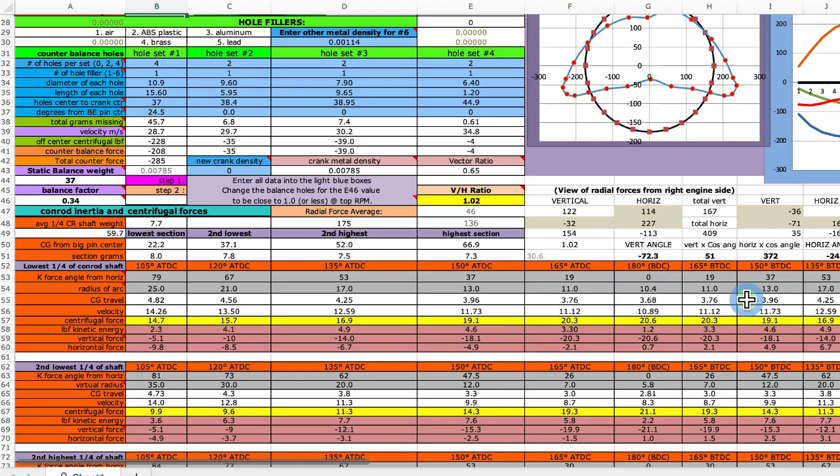All those calculations having been done mostly down here. And so the vertical to horizontal ratio is demonstrated right here. Let me show you what I mean. So you've got the lopsided circular graph of the crank rotation and the forces. Actually, let me show you. So right here at TDC, you've got a vertical force of that amount.

And then 30, 60, 90. Right here, you've got that. It's not completely horizontal. Look at that. It's somewhat downward. That's at 90 degrees. Then you've got bottom dead center. And then you've got 270 right here. So those are the vector forces.

And what I found works is taking this section of the vertical close to TDC and this section of the lower portion, which includes a little bit more of this horizontal effect out here, and compare the two. That's the vertical, that's the horizontal. And so you can call that also top dead center, bottom dead center. 1.0 is the ratio. That's at 6100 on my engine.

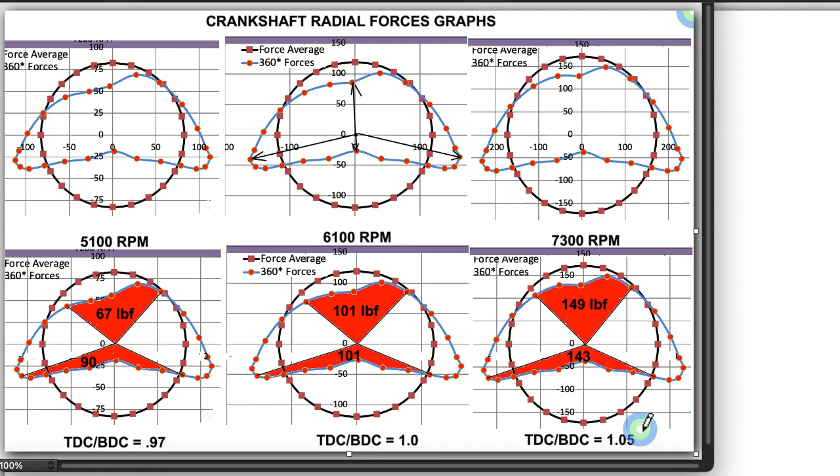At 5100, you can see that the horizontal is more than the vertical, which creates an imbalance. So that's off by 3%. And then at 7300, it's off by 5%. So we got the vertical and horizontal computed here, and then when you figure in the actual average forces involved, this is the graph that you come up with, which is more like what you feel, okay? Which on my bike it's 4% off for most of the RPM up to the high RPM.

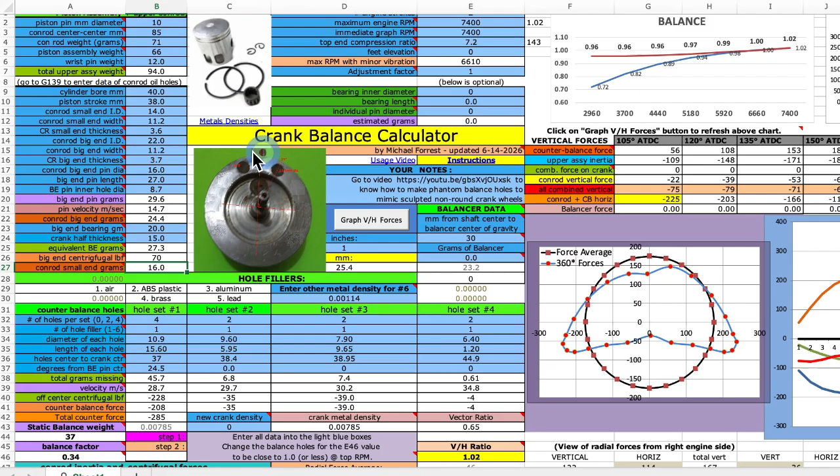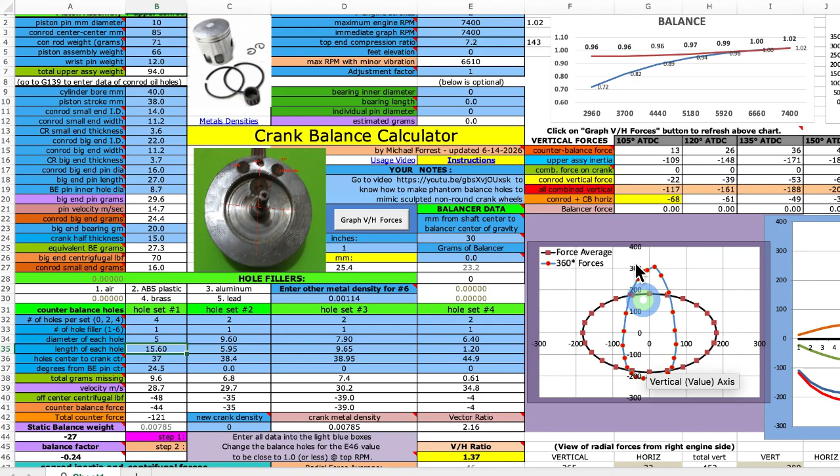So I'm going to show you what happens when you reduce the hole size. One of these holes here close to the conrod pin, if you reduce the hole size, see it becomes more vertical? Because these holes on this side, not on this side, these holes on this side counteract the piston assembly weight. And if you don't have enough holes to counteract that, then the vertical difference becomes more. And the same thing if I make the holes too big, then I've reduced the vertical a lot and it's got a lot of horizontal component there.

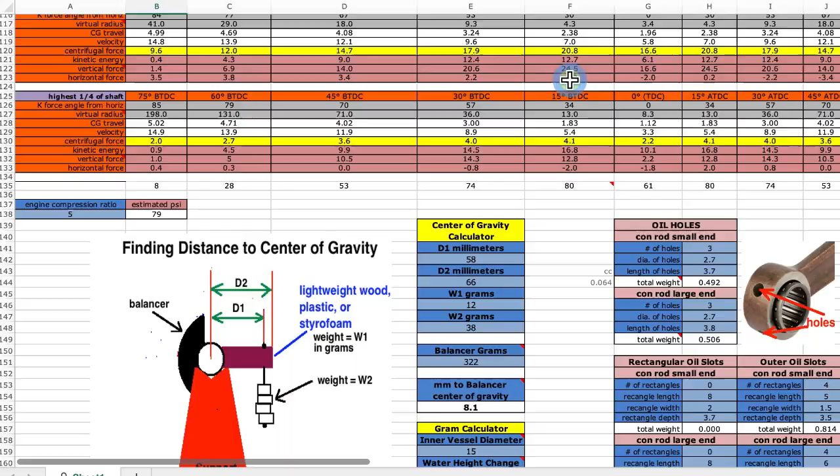So right here is the maximum engine RPM, the very top that your engine will rev out to. The top end compression ratio is figured in. That little dip right there, that's due to the compression. Okay, there's a little calculator for that. Down here, this section right here. And every cell that has a red corner on it, you should hover your pointer over it so you can read what the hidden comment is to be fully informed.

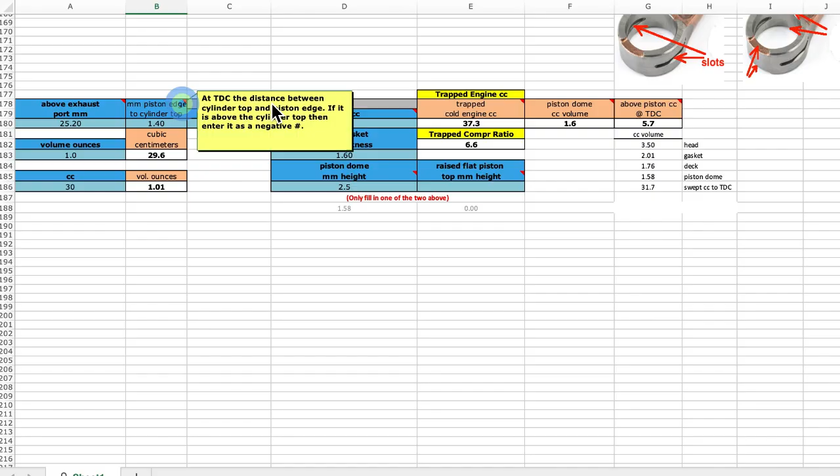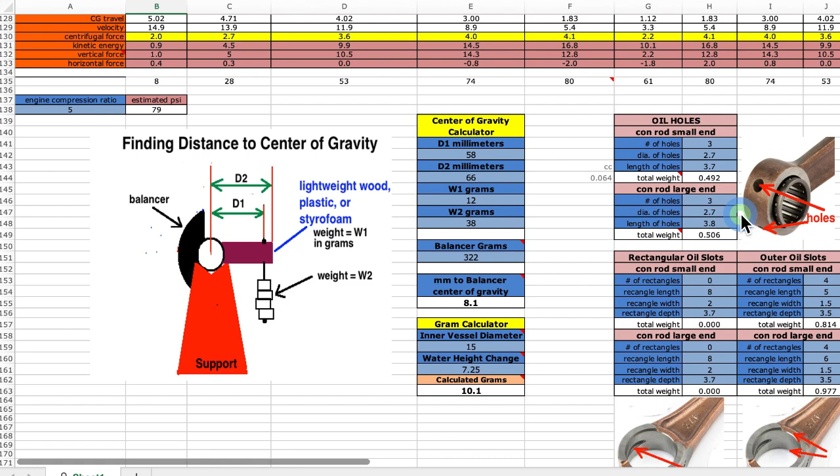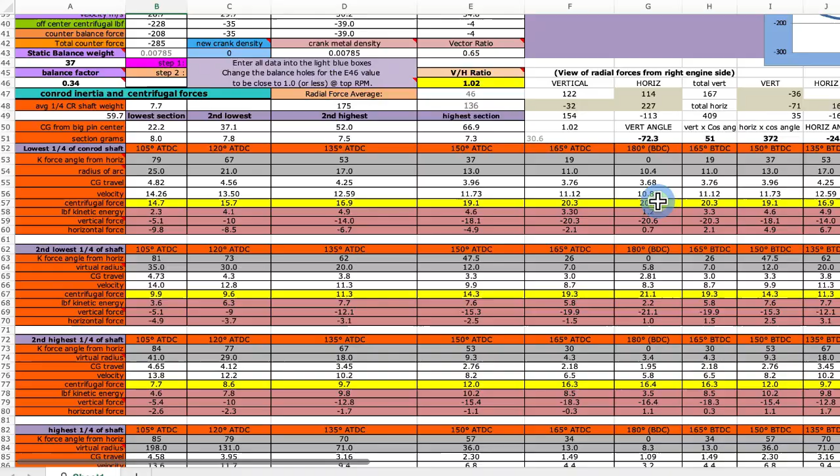Figuring out the holes in the connecting rods reduces the weight of that section, the small end or the large end. And then you've got rectangular slots. They also do the same thing. So this section is also necessary to fill in because it is utilized in this cell and this cell. I'm not 100% sure about the counterbalance shaft, the extra balance shaft that some big engines have, but here's the input for it, and you can read about it, the grams and the distance from the center of the shaft.

So after entering everything, you just click this right here, and it will recalculate for both of these graphs. And you can see visually, or you can just look right here, and it will tell you at what RPM those graphs cross the 1.0 mark. And in this case, it's 6,600, which is right here. Which is good, because if my bike revved all the way to 7,400, then that would only be 2% off. But generally speaking, I like that 1.0 to be somewhere along this section right here. Ideally, it will be beyond what this section is.

For instance, let's say my bike revs out to 6,300, and I calculate. You can see how this is dipping a little bit farther down than what I like. This is like 6% down. So you have to consider the whole thing. Are you going to be mostly at the high revs? You're trail riding and street riding. You're using the whole range. When that 1.0 is to the left of the very end of the graph, you can see that this right here doesn't dip down as far. This is a 4% difference right here. Mostly just as long as you don't have more than 2% at the very top RPM.

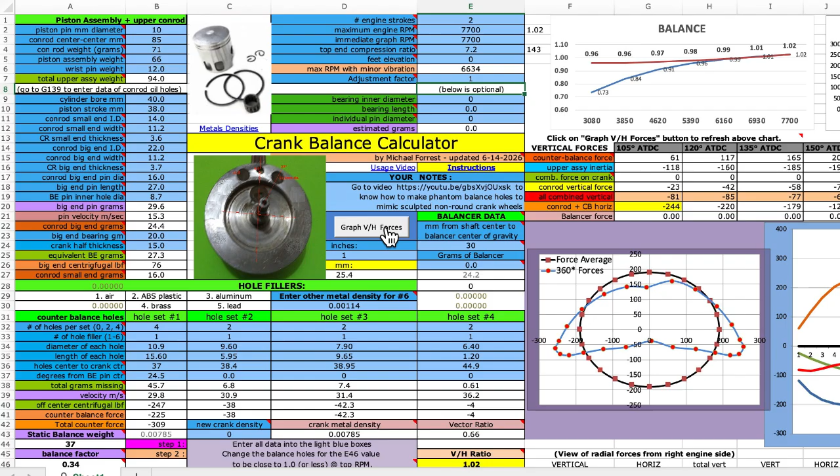If after you've done everything, hopefully you entered everything in correctly, and this is showing a 1.0 at a different RPM than where you feel it's happening at, the 1.0 representing the high RPM at which you can start to feel it starting to vibrate more. So if that's not harmonizing with what you feel, you can make corrections right here. You want it to be 10% lower, you do that, or you want it to be 10% higher, you do that. So this is the correction factor. But usually it's pretty right on if you did all the measurements right. So I guess that's all for the basics of the program.